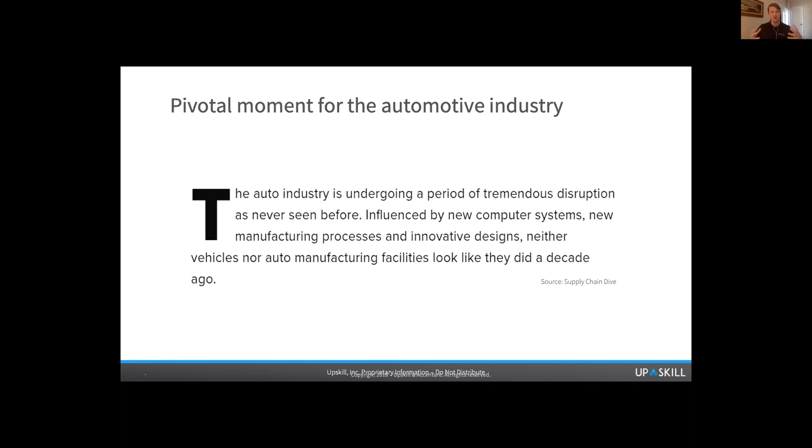And so that is on top of just your normal day-to-day challenges of driving productivity, providing high quality, and bringing on new people that are competent and get up to speed quickly. So this particular time, I think we have that extra challenge of dealing with all this new technology on top of our normal jobs.

And so if we look a little further and look at some specific trends, again, this is across auto in general, but I think a lot of this applies to your particular companies in Manitoba. Trends like electric vehicle and connected vehicles, especially adding different systems into the vehicles that weren't there before, and having to accommodate not just the manufacturing but the service and the testing of those. So that in turn drives changes in the manufacturing process.

And so now you're needing to train people in a different manner, or update your source materials and then get those back out to your operators or your trainees. I know with auto, maybe consumer auto in general, there's a lot more customization that's available. And so we just have a higher variety of bill of materials, higher complexity and higher variability ways to build things. And of course, you have to do all of that while keeping up with production demand.

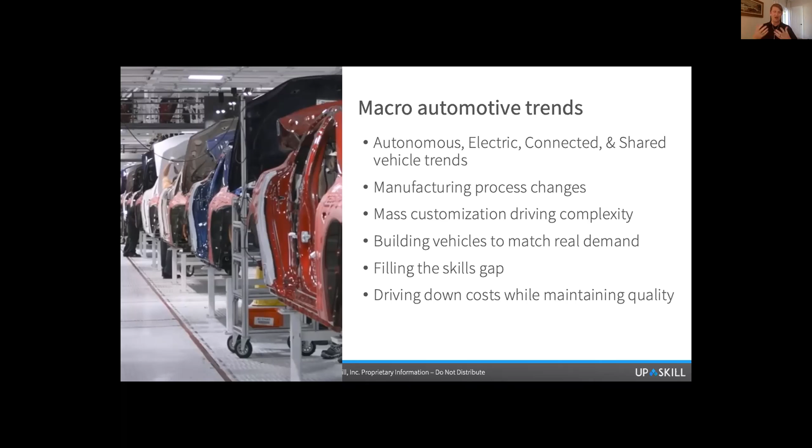And so these are the things that we're trying to help our customers with. That's why our platform exists, is really to help workers be more efficient and do their jobs with higher quality, more productivity, that type of thing.

So why specifically can AR wearables be valuable to you all? Well, there's a few reasons. If you think about it in the things we've just been talking about, how do we deal with all of these changing materials or processes? Well, AR and wearables can help with that because you can have a more nimble way to accommodate a wider variety of SOPs or instruction sets.

You now have a mechanism that you can use to deliver these materials to your people at their point of need, right? And like Ron mentioned, if we can reduce wasted motion, if we can reduce trips back and forth to the workbench or trips to the filing cabinet to get the binder with the instructions, we can help not just with productivity, but with quality as well. And honestly, with the workers, just job satisfaction and performance.

So that's kind of specifically how AR and wearables can start to help, providing digital information to your people when and where they need it. And if we do it on smart glasses, it also has the extra benefit of being hands-free. So they can see it in their line of sight when and where they need it. They can keep their hands on the machines or on the tools. And so that allows you to alleviate some of the more manual processes by closing the gap between the information they need and the job that they're actually doing.

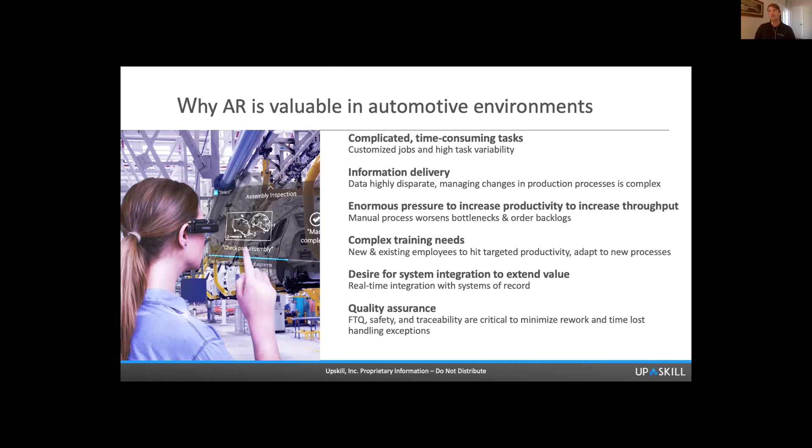So these are just some general ways that using a technology like this can start to help with the challenges that you face in production and in aftermarket service and things like that. So let's get a little more specific now and talk about the use cases themselves, or the more practical applications of this technology.

So with complex assembly, we see this use case quite a bit. And as we've discussed with a few previous points, it lends itself well to leveraging wearables and AR software, because you have typically a very complex manual or mechanical instruction set that you're working with. You have to use very fine precision to place or connect or tighten or assemble things, right?

And if you can leverage up-to-date digital information, in complex assembly we actually would have the ability to customize it so that you can go part by part, or get a much more colorful or intuitive view of the instructions versus just working off of a single sheet of paper or a single schematic.

That can help with both productivity and quality. So we see complex assembly, or specifically wire harness insertion, as a pretty common use case that we work with.

On installation and inspection, similar on the installation side, you can follow step-by-step procedures in a digital manner that lets you traverse the process step by step versus viewing everything in one page.

On the inspection side, it allows you to more seamlessly capture the results of the inspection. If you were doing it by paper, you'd have to file it in a cabinet or upload it into a software system. If it's already digital and connected to your system, as soon as the worker finishes the inspection, it's already in your system and ready to be reviewed.

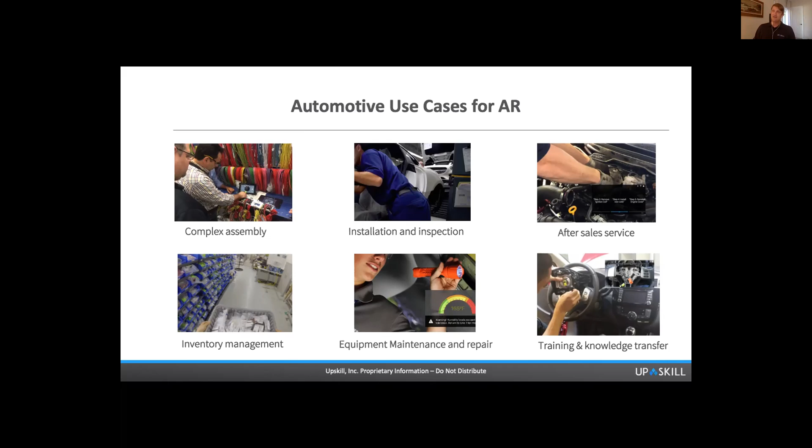If I take a bit of a step back and talk about how we approach it, our software platform is called Skylight, and it is a full AR or connected worker software platform.

The reason we take a platform approach is that, as you saw in the previous slide, there are quite a variety of things you might need help with, that you might want to leverage wearables or mobile devices for. So we don't take a point solution approach where we give you a tool just for live video, or just for work instructions. We have a full platform upon which we can enable multiple types of these connected worker use cases.

So those automotive use cases I mentioned before, we can enable them within Skylight across one common software platform with a common software experience.

You could start with one use case, like live video support or wire harness builds, and then expand as you become more comfortable with the technology. On the flip side, we take a hardware agnostic approach, supporting several types of hardware you could deploy onto. What we want to do is help you fit the right tool for the job with your people.

If your people need to be hands-free, with quick access to information, or need to show live streaming video from their own point of view, smart glasses are a great choice. We support 3 different types of enterprise smart glasses, but we also support tablets and phones, with native applications for iOS and Android. And on your desktop or laptop, you can run Skylight in your browser. So it's a variety of use cases across a variety of hardware targets.

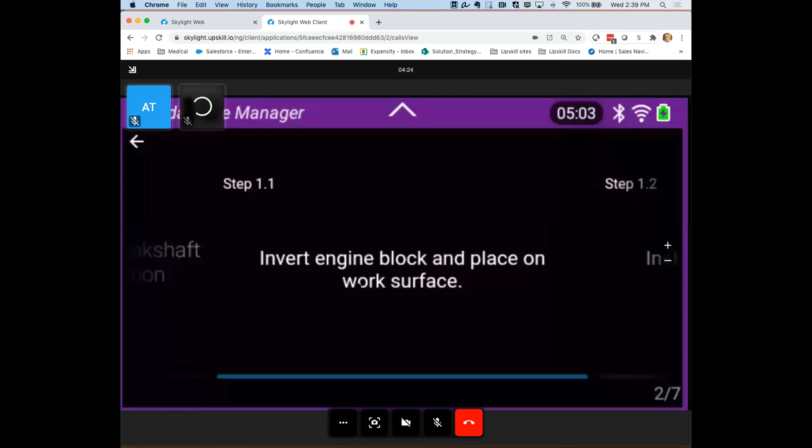Now let me look at what step you're on in the instructions and guide you through what this is actually saying. So you can have that combination of viewing the actual materials that your counterpart is seeing on their glasses and then going back and seeing what they're doing in the real world.

So this was just a quick demo of what this looks like using Skylight. Hopefully you can see or start thinking about different ways that it might be useful in that remote assistance standpoint or remote training, that type of thing.

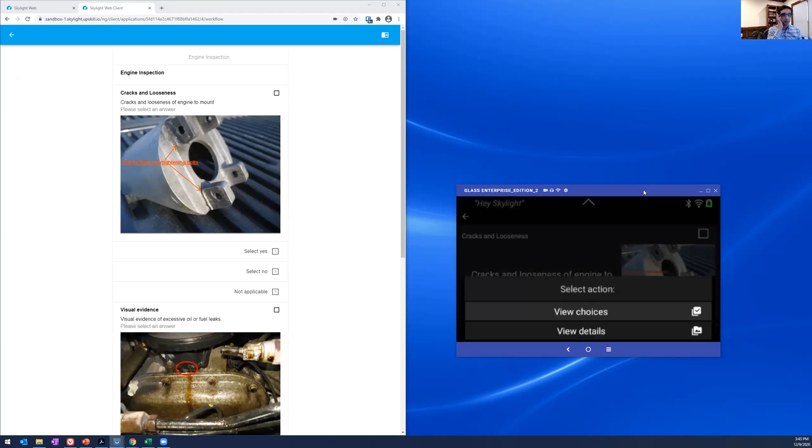So the first step of the inspection is to check for cracks and looseness of the engine to the actual mount itself. It's a multiple choice selection, and I can view my choices on the glasses. I can select yes, no, or not applicable. I'll go ahead and select yes. When I select yes, it marks that step as done, and on the left-hand side you'll notice the selection appeared and that step was completed in real time.

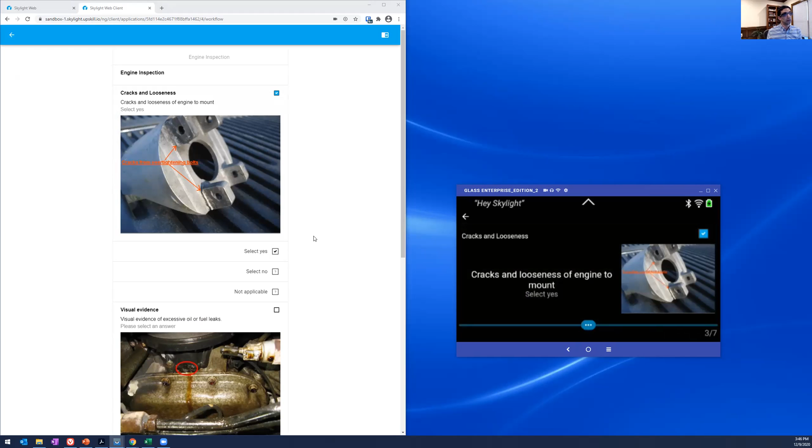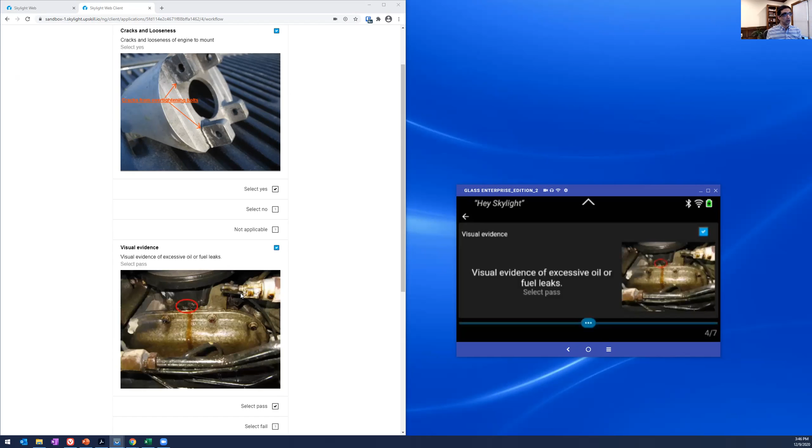Now I can scroll forward for the visual evidence of excessive oil leaks, and I'll go ahead and select pass. It was updated here on the left in real time. Then I can look at whether everything was properly torqued, and I'll select pass again, updated in real time on the left.

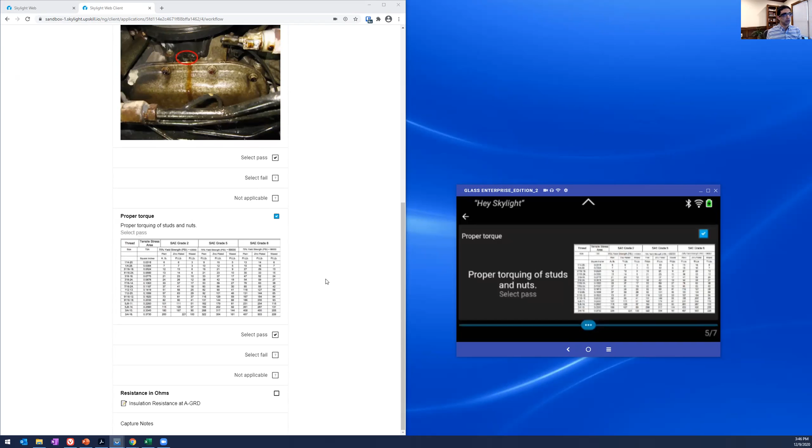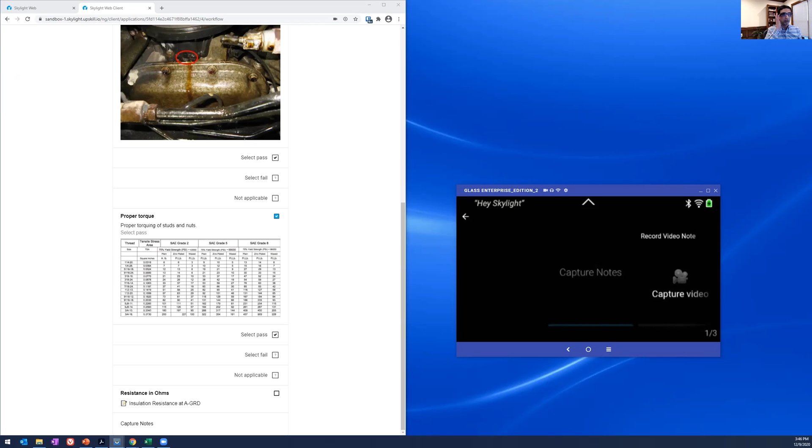And then if I wanted to, I can capture notes. There are two ways of capturing notes with the glasses, using either a video recording, or if it's a photo I wanted to capture, I can select capture notes. Let me go ahead and snooze that. Sorry about that, I'm going to go ahead and capture a video with my glasses.

If I take a look at the part, I can say everything looks okay, and I can speak during the video so I can reference that at a later point, and go ahead and start and stop recording.

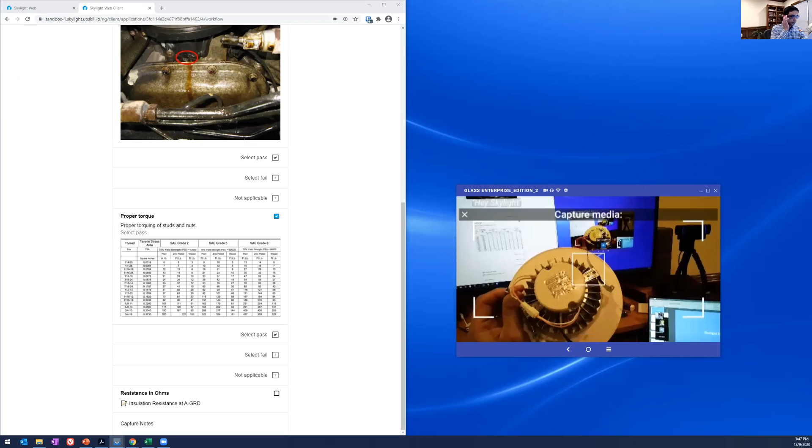So I've got one video that was captured, and then if I wanted to capture a photo, I'll go ahead and capture the photo. Here on the left-hand side, the data I actually collected is going to be available if I was a supervisor. As a normal user, I wouldn't necessarily see it, but I'll show you what that view looks like from a supervisor's perspective.

Another item I wanted to showcase, depending on the type of device you're using, you may be able to leverage your voice to capture certain parts of the process. So if I go over to the step that records the resistance, and select that, 16 - what it did there was use the voice engine built into the Google Glass device to record what I said as 16 and input that as a numeric input into this specific step, which actually requires a numeric input. So we can do validation along the way in real time.

And I'll note that the transcription the glasses uses is not using anything out in the cloud, it's actually all on device. So in cases where you are disconnected from Wi-Fi, the glasses will still work and the transcription can still happen. That is the workflow capability.

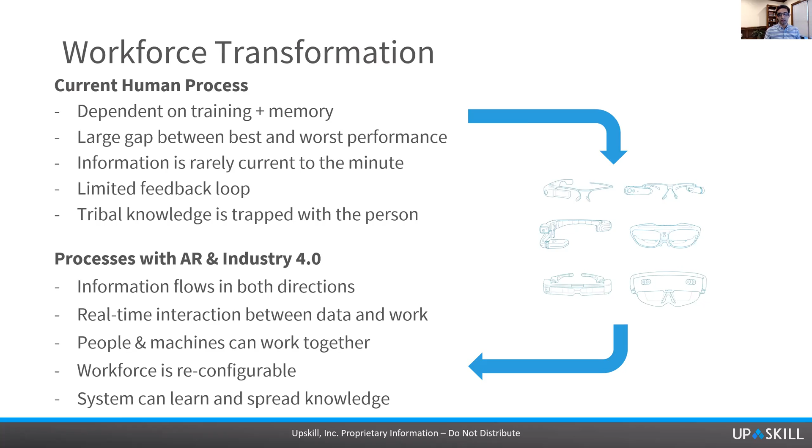So in terms of how we go about doing this, we wanted to touch on a few bullet points about getting started. In terms of best practices, what we've seen across the board, the first thing you want to focus on is identifying the use case that involves minimal changes to the existing processes.

Also something that can be evaluated in a short period of time. When I say identify something that requires few changes to the workflow, this really means try not to disturb the workforce by introducing something that's going to add more time to what they're already doing.

If their work is really time dependent, a lot of users would hesitate to put on these glasses and try something new. So you want to make sure that when you introduce these glasses, you are not adding a body of work in addition to what they're already doing.

At the same time, when you want to evaluate the impact of the glasses, you don't necessarily want to extend the time frame to do that for 5 months, 6 months, etc. You want to identify a key pain point whose metric can be captured within a short period of time, so you understand best practices of that workflow, can tweak and adjust, and then expand to other users so business leaders can start tracking real production metrics.